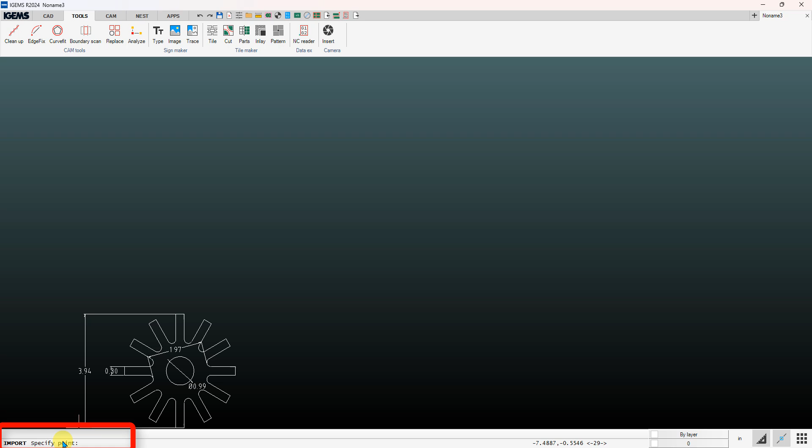And I'm going to go with manual placement. I'll insert the file name. Specify point where I want to put it on my screen. I'll left click. Specify height. That's the height of the text. That'll put the part name on there. I'm going to left click,

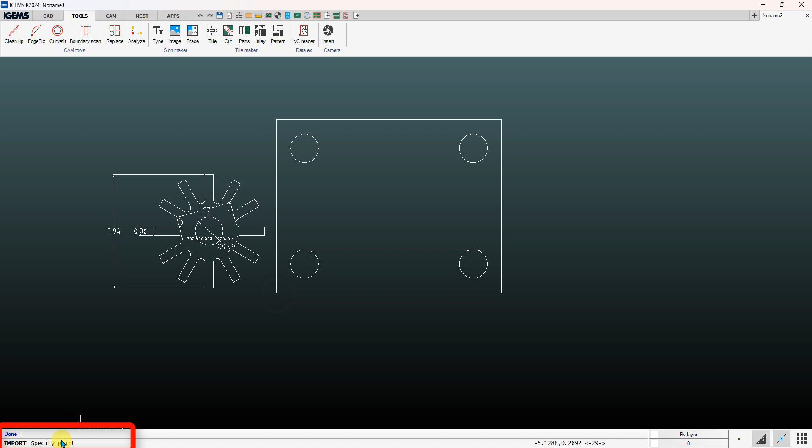and we'll left click there. And next part, specify point where we want to have it. Left click, and then specify a point for our text. Okay. Got some dimension lines here. I'm just going to go ahead and delete those.

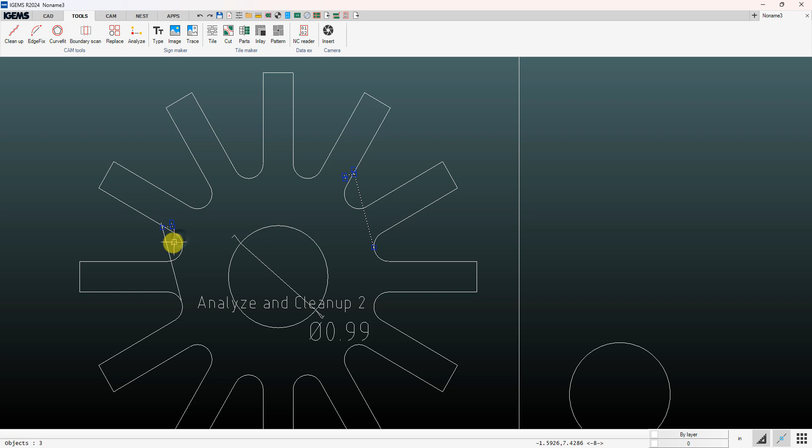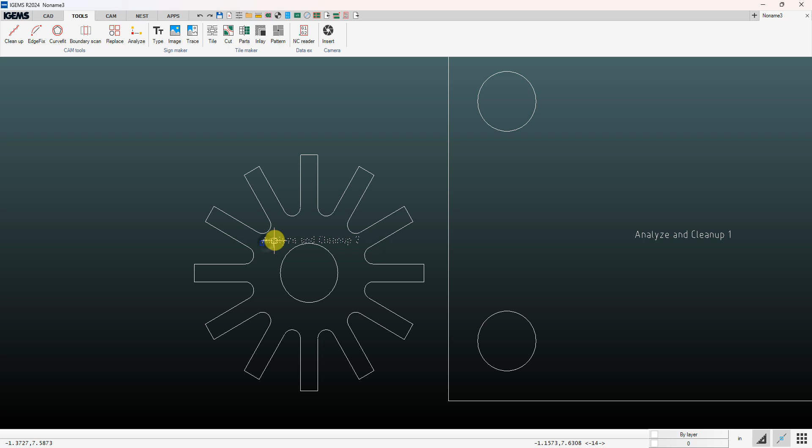Hold down your Shift key and click on something if you accidentally select it and you want to deselect it. Control Z, undo. Okay, I'm going to move this up here a little bit. I'm also going to double click on that and make that a little bit smaller.

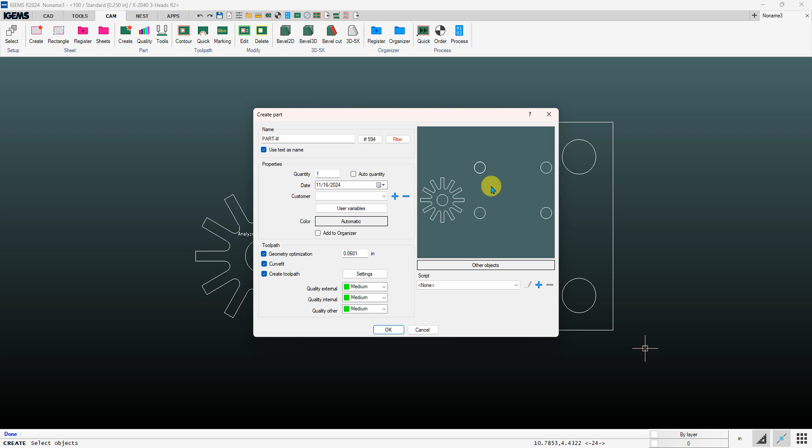We go to CAM and we try to create parts and drag a box around these. Left click, enter. We see in the preview window the part on the right. We don't see the outside of it. That's a good indication that there's something wrong in that DXF file. We'll just hit cancel. And we'll go to our Tools tab and Analyze.

The part on the left had some yellow X's, as we saw in the preview window, but those yellow X's apparently weren't enough of an issue to cause any problem creating the part. However, the part on the right, we see some red X's. Those tend to be a little bit more significant. This circle here has both yellow and red X's.

The Analyze tool is basically a toggle. Click on that to toggle those X's on and off. If you click on it and you don't see any yellow or red X's, then your drawing is clean already. If we click onto this circle, you'll see when I click on the perimeter of the circle that we basically see the 5 grips, and then the circle remains solid.

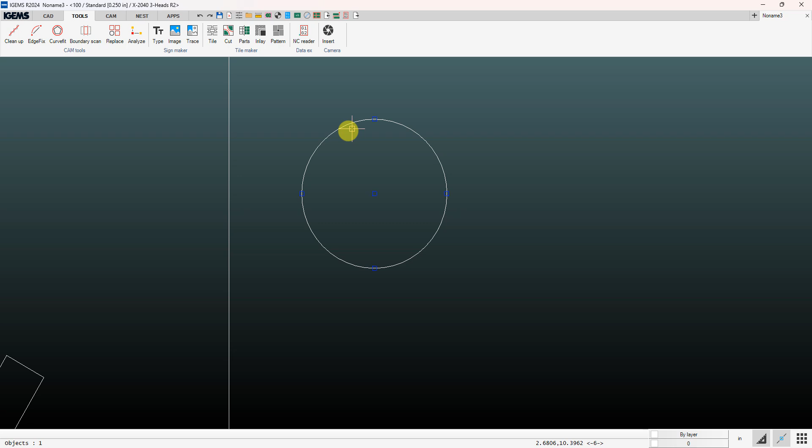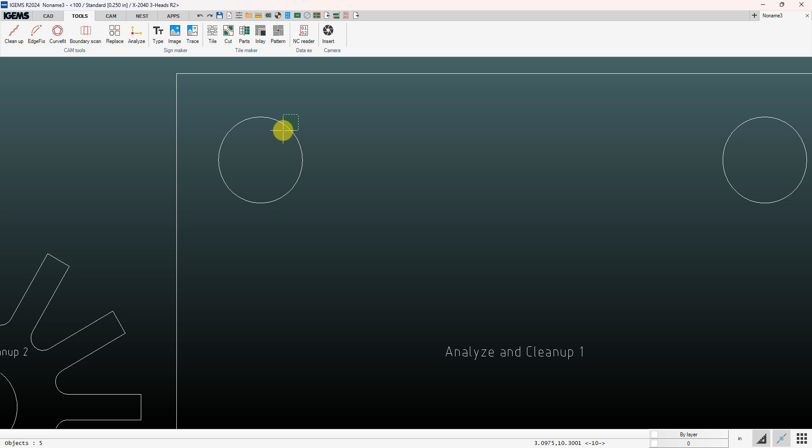Normally when you click on a line segment or an arc, it'll show up as a dashed line like that. If I click on this one here, dashed lines. The fact that this is solid indicates that there's at least 2 circles on top of each other. There could be more. If I left click and I drag a box right to left, down here in the bottom we see that there's apparently 2 circles there. Hit escape. I could just click and delete one of those, but we're here for the cleanup tool, so we'll use that.

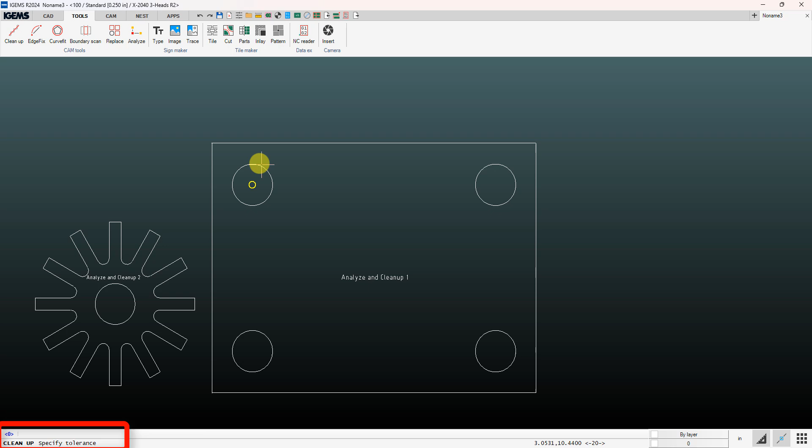Okay, we'll start the cleanup command. Once you start it, down on the bottom, it prompts you to specify tolerance, and the default value at this point is 0. If you leave it at 0, it's only going to remove duplicated entities. This circle here, it'll delete the extra circle, but if we zoom in on some of these corners here, it's not going to close up these gaps if you leave the tolerance at 0. I usually like starting at 0 the first pass and see if that takes care of everything and then go from there. We'll hit enter, drag a box around everything, hit enter.

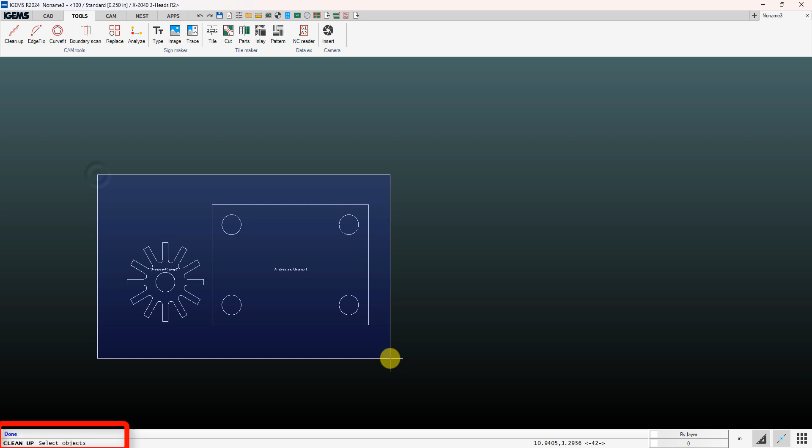Down at the bottom shows us before there were 70 segments and now there's 57. If we do the Analyze again, the part on the left doesn't have any more yellow X's. Not that they were causing us an issue anyways, but they're gone. And then we're still getting red X's up here where we've got these gaps. I made these gaps different distances, and by doing that we can see the effect of the tolerance number that we type in at the bottom when we do the cleanup the next time.

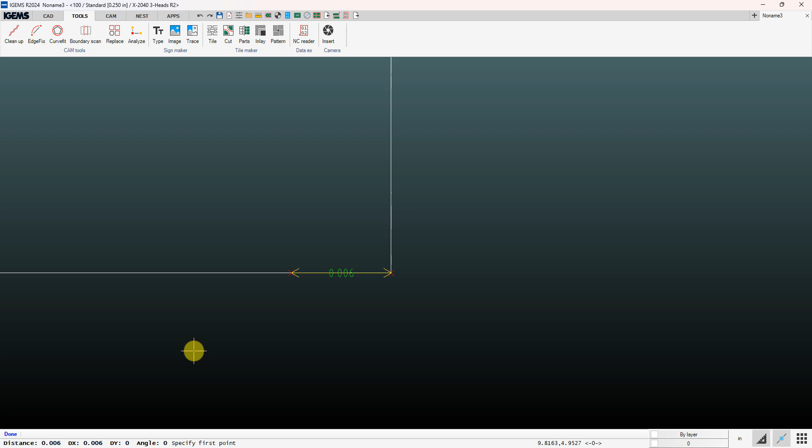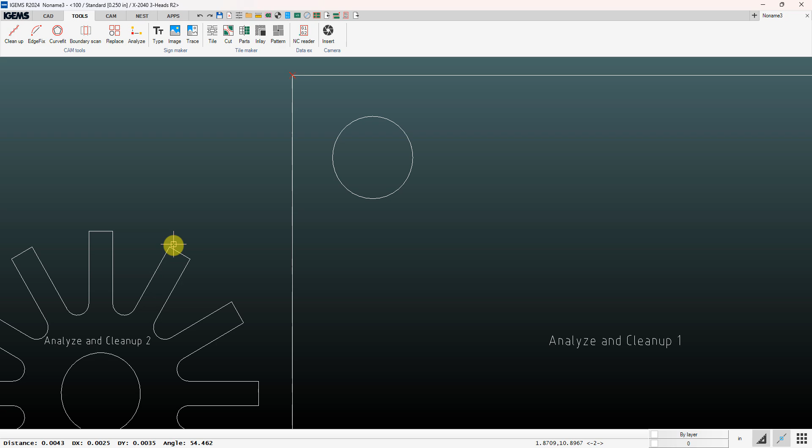That gap there is 6,000ths of an inch. Come over to here. This gap is 4,000ths of an inch. I'll hit escape to remove those measurements. Similar idea up here. This gap is about 4,000ths of an inch. Let's turn off the analyze and we'll do the cleanup again.

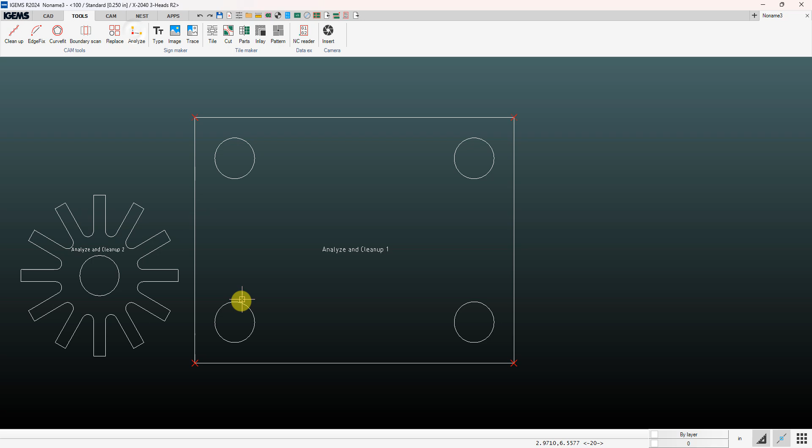Specify tolerance. If I type in 0.003, and I don't necessarily have to select the drawing on the left since I've already cleaned it up, but I'll just select everything anyways, hit enter. Shows us 57 segments before, 57 segments after. Because my tolerance was smaller than all those gaps, it didn't do anything.

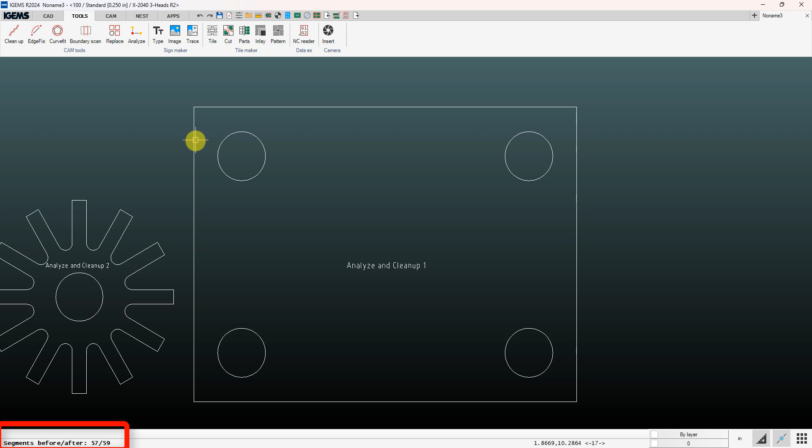Do cleanup, and this time for the tolerance, 0.005, enter. I'll just do a Control A this time, select all, hit enter. Now it shows us 57 segments before, 59 after. If we zoom in here, we see that's drawn a line across there to connect those 2 points. We can do the analyze and see what's left over. So here it's closed up that corner, and over at this corner we still have a gap there because that gap was greater than 5,000ths of an inch.

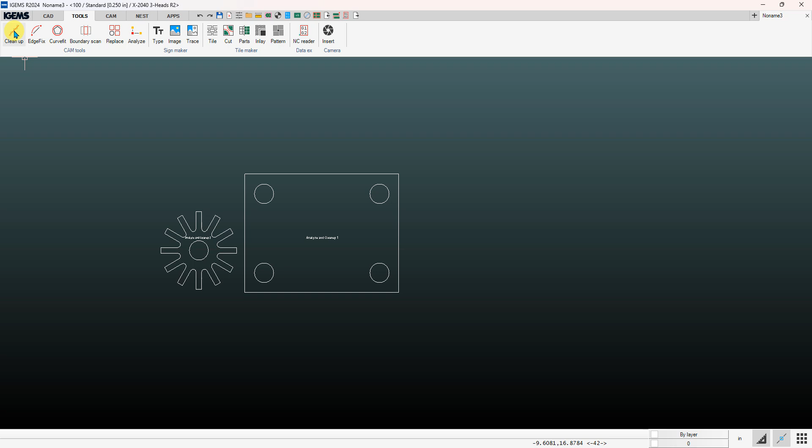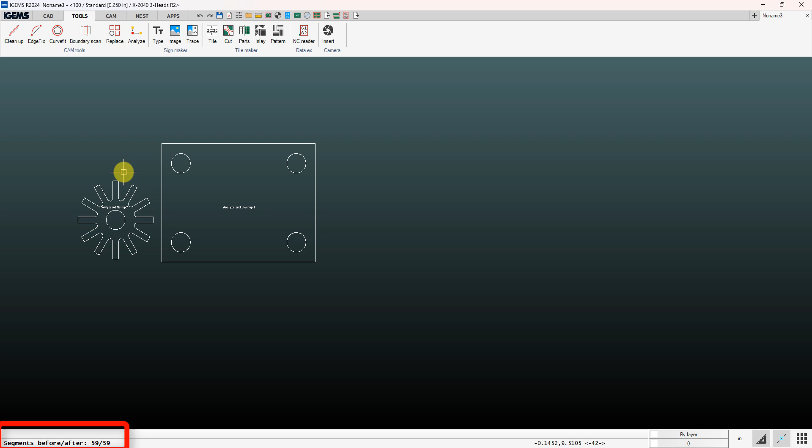Escape to get rid of that measurement, toggle off the analyze, back to cleanup, 0.006. And since that was right on the border, it didn't clean that up. 0.0061. Now that's closed up. That's the basic idea of how the analyze and cleanup tools work.